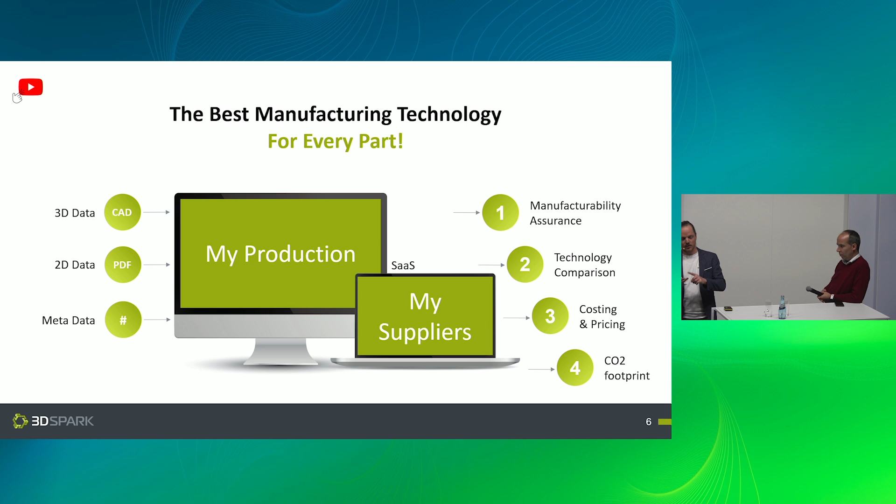So with that, all of the 4 main decision pillars are available: cost, quality, time, and sustainability, to make good decisions in the manufacturing and procurement of parts.

And with that, this now enables smarter make or buy decisions. It then allows, if the decision goes towards making the part, to select one in-house production option and generate a quote through auto-quoting. Or if the decision is towards buying, to select the qualified connected supplier and with one click forward the RFQ. And lastly, by performing these tasks, automatically a lot of information is gathered.

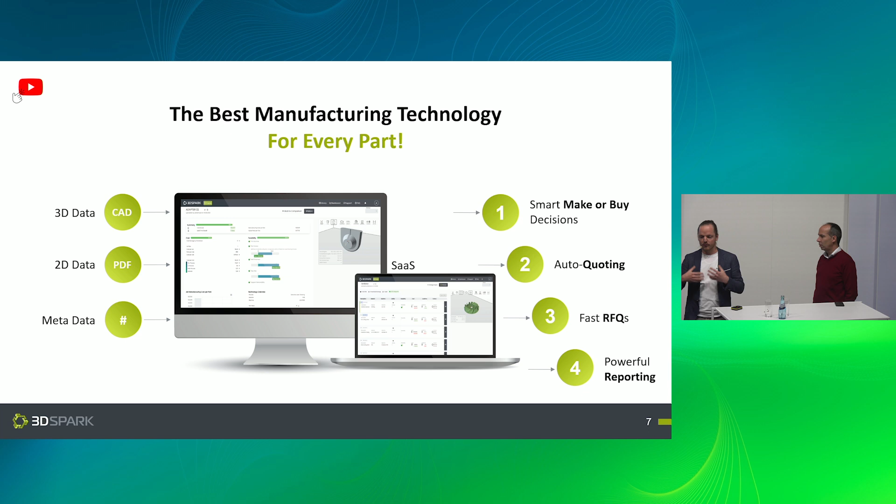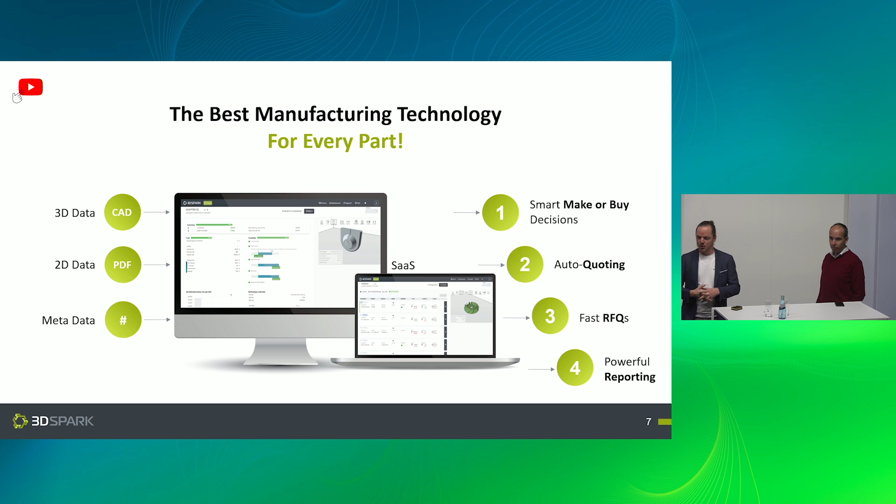Basically, organically, a digital warehouse is being built up. And KPIs like cost, lead time, and CO2 savings are gathered, which help a lot with management reporting.

So that was on the high level. Looking at the time, going to jump quickly over the details.

For every machine material combination, there are a lot of different manufacturability checks that are performed.

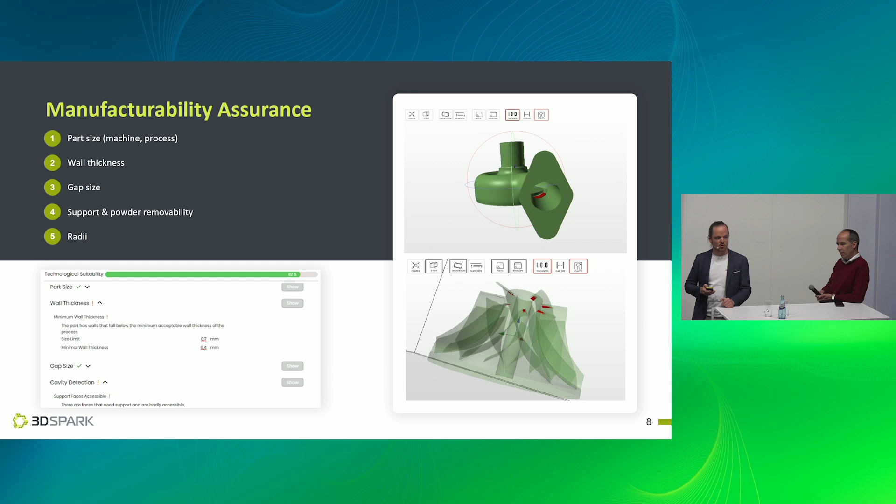Then when looking at the core of the costing, the make costing, it's important to see that all industrially relevant AM technologies are included regarding metal, polymer, and ceramics, but also more and more conventional technologies like rapid casting, injection molding, milling, etc. And we're building more and more to really build this Google Maps for manufacturing.

Also important, the calculation is always done on the process chain level, bottom up. So this means it's not a black box, but it can be 100% benchmarked to the production reality, and therefore accuracy can be proven.

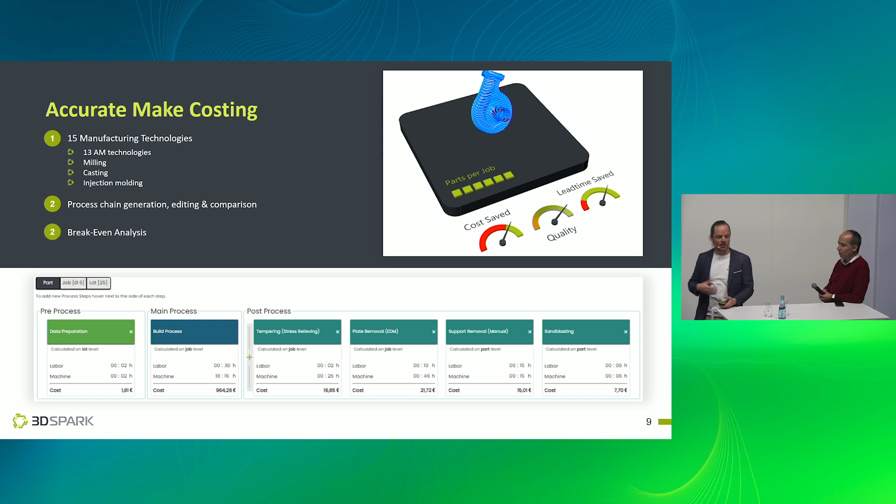And as you see, these numbers, the labor time and the machine time estimations, etc. For this, we leverage advanced algorithms like orientation optimizations, nesting optimizations, etc. And this then allows providing break-even analysis where you really see all of the in-house production options and which makes sense in which case.

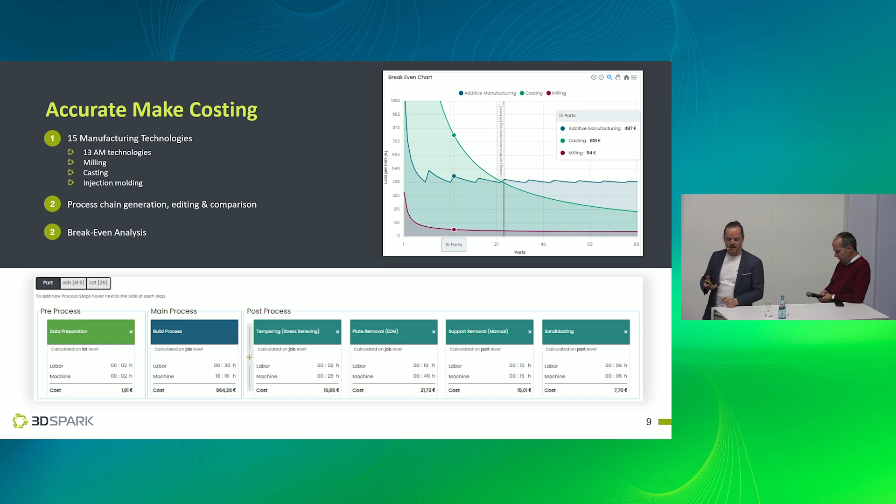As said, there's also a CO2 footprint calculation. It's a cradle-to-gate calculation. Could go a lot more into detail about that.

With all of this as a backbone, this now allows also providing a so-called part request portal. This is like a super light version of the software, specially designed for non-experts, which allows Ignacio, for example, to scale AM internally via single sign-on. Everybody can access it and easily request quotes on a self-service level.

The same portal can be used by manufacturing service providers to put onto their website, to actually turn website visitors into paying customers.

The second point I briefly touched upon, talked a lot about the production side. It also has the My Suppliers side, which is like a supplier panel where you list your qualified suppliers to get live price indications and forward RFQs with one click. And this is obviously also interesting from the supplier side, to receive targeted RFQs with native complete data.

Very quickly, how the software works, as is proven by our customers. On the service provider side, we see that it allows generating 10 times more quotes in the same time, really improving efficiency. It saves actual costs, and especially when using this website integration, the answering time is instant, much quicker, which really leads to a higher win rate, higher ordering rate. So more business won, which is what it's all about.

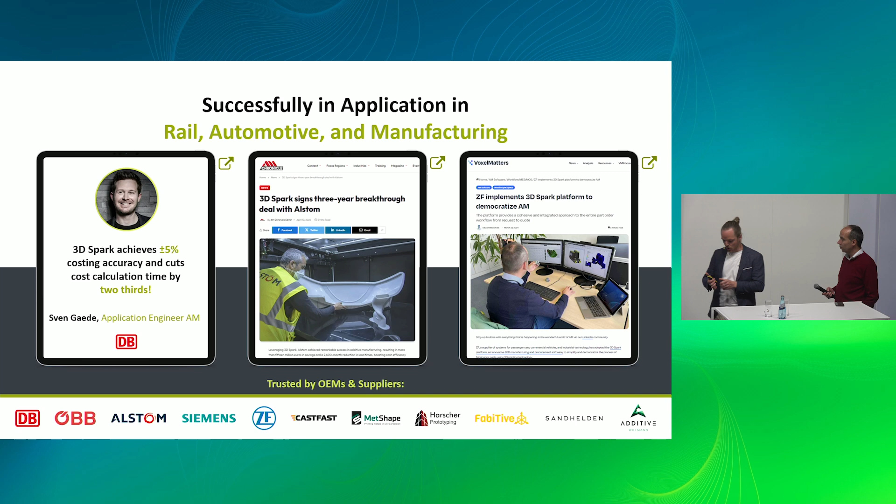Very much successful in application, the software in the mobility sector, especially rail, but also automotive. And that's the hand over to you, Ignacio.

Thank you. I think, yeah, you can hear me perfect. So I am not used to speaking to the microphone. I have to get used to it. So Ignacio Loba is my name. I am working for ZF and leading the department for additive manufacturing.

So we started the cooperation with 3D Spark some years ago. We have some problems, as Ruben was telling you. The amount of requests from colleagues looking for a prototype, a tooling, a jig is increasing almost every day.

In the past, we were working every day with emails and phone calls, asking, is this part printable? What are the costs of this part? We needed to improve this process.

For this reason, we got in contact with Ruben, and then we started a pilot project within ZF to test the 3D Spark tool, to check the manufacturability of the parts, to have a rough quotation in the beginning.

The guys from controlling in the past, they were asking me or my colleagues in my department, how can I improve the design of the part to make it printable? And always it was a phone call, long meetings, and with the tool of 3D Spark, they can do this job by themselves. It means they make a modification, they upload the part into the system.

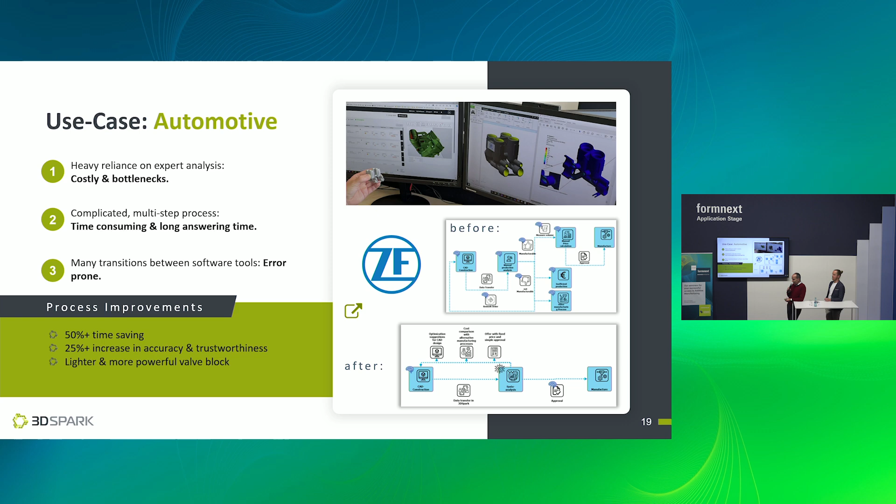So after this analysis, after this use case, in this setup starting with the 3D Spark tool within ZF, we go further. Parallel to these activities, we started to set up a new project, a funding project.

This funding project is supported by the German government. It's a BMWK project. The name is nexAMo.

In this project, we want to go further with the 3D printing process and build up a new environment for the 3D printing process. What is a new environment for the 3D printing process?

We are thinking about how to bring this technology to the next steps, and our goal is to build up a matrix production. What is a matrix production?

In this matrix production, the idea is to put all these machines together in one hall, to have the possibility to be flexible, to be modular, to increase the amount of devices according to the demands we have from our customers, and at the end of the day, to build up this kind of new environment.

Using cobots, using AGVs, to set up the possibility to adapt our demands from our customers to the current situation. What we are doing, you can see here - our strategy, our mission is to bring this 3D printing technology and other processes like finishing and quality assurance to the next level.

Bringing this 3D printing technology and the other processes like finishing, like quality assurance, to the next level, setting up this matrix production concept.

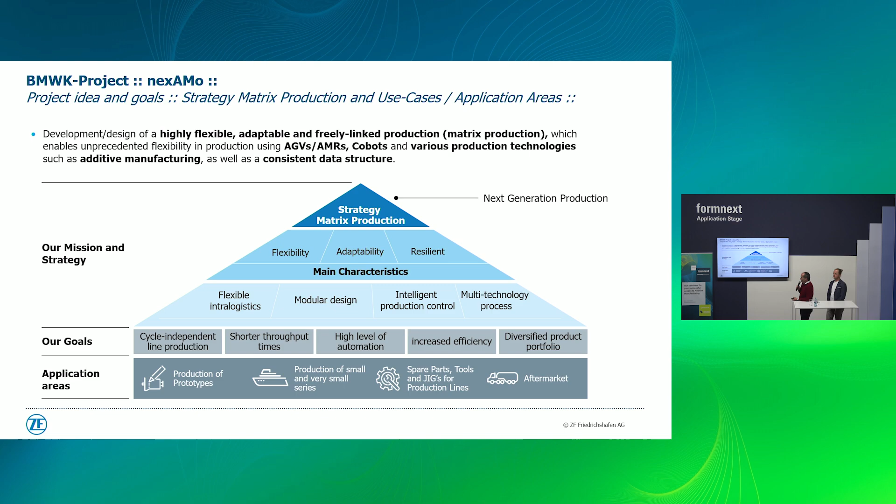What we are going to do in the project, I am going to put in the next slide. To set up this matrix production, we define 5 areas for research and development. The first one, we define what is matrix production, what is needed for this matrix production for additive manufacturing for the next generation.

In the second area, we want to focus on the intralogistics, how the machines should connect to each other, how to work with the cobots, how to work with AGVs, AMRs. And the third area is everything that you can build in the physical way.

You need today a digital twin. You need to build up one IT system. That is what we are working on together again with Ruben. And in the software, how to coordinate this production planning, how to coordinate the assessment of the part, the production of the part. Later on, the research areas 4 and 5 are focused on 3D printing technology by increasing and optimizing the additive manufacturing technologies, using new materials and bringing out the production demands from ZF.

As you can see here, the idea is that one person within ZF has a need to print, for example, a control arm like here. He orders the part. We have the assessment tool, which we'll see in the next slide. He can realize if the part is printable or not.

If it's printable, we can go into the order management tool, into our machine production planning, and then the machine is going to describe what is the best process steps to go through to get the final part.

In this idea, we want to consider the modularity and the status of the machines. If one machine is broken, it is possible to replan in real time, to readapt the route and then readapt the production of this part.

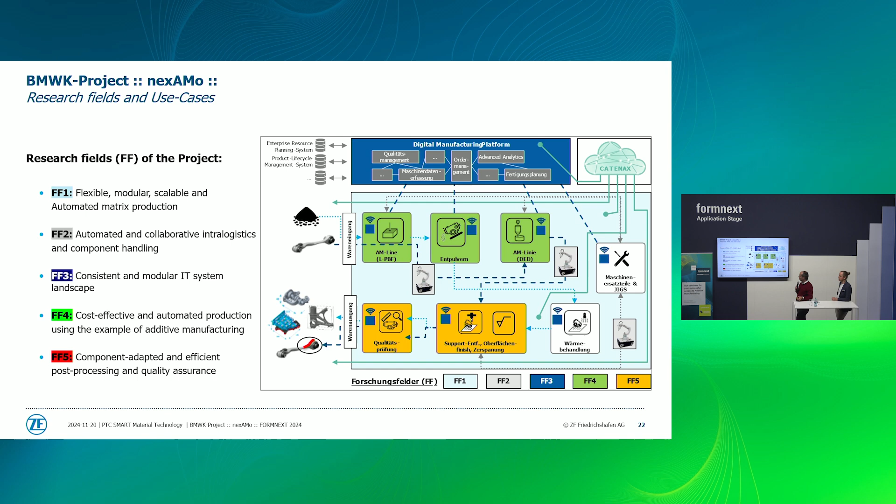I hope it's coming. No, take some time. Not my problem, sorry. Talking about this, okay, now.

This is the idea behind preparing and working with this production. We are going to implement the 3D Spark tool. In the 3D Spark tool, we are going to take care of the design for manufacturing, to have assurance of the manufacturing of the parts, to have a first cost evaluation of the parts, to have a technology comparison, auto quotation, what Ruben was showing us.

And then later on, with this process, we are going to put this information together in our system to plan our production, to simulate our production by using these AGVs, by using these cobots, and optimize the capacities of the machines, and later on go into production.

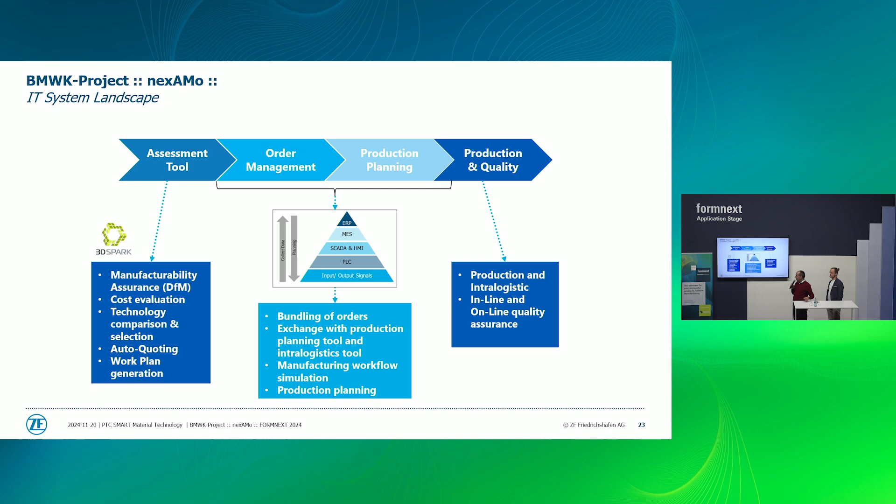That is the idea behind what we want to build up in the nexAMo project, and that is what we are focused on for the next 2 years, let's say. And that is, from my side, the last slide. Thank you very much for the opportunity to present this project together, working together with Ruben.

It was a nice work. It will be nicer now with the nexAMo project. And then I am happy to try to bring this additive manufacturing technology to the next step together with Ruben, with 3D Spark. And I think that this matrix production will be the future for ZF and for other companies to go in this direction. Thank you.